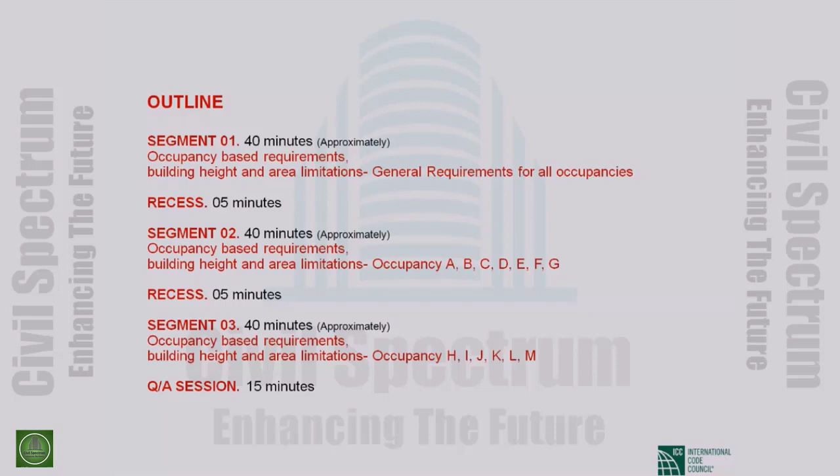So today's session will mainly focus on part 3, chapter 2 of BNBC. And so let us start with segment 1. Occupancy-based requirements, building height and area limitation. What are the general requirements for all the occupancies?

So to know the general requirements, we will go to section 2.4 of part 3, chapter 2. If you have the BNBC available with you, it will be on page 2673. So you can have a parallel reference from there if you wish. Part 3, chapter 2, section 2.4.

It covers basically these 6 subtopics. One is location on property, then the allowable floor areas, then permitted types of construction, general provisions for high-rise buildings, helipads, universal accessibility.

However, in the structure of BNBC, we must understand that no particular chapter or part is self-sufficient. We always use cross-referencing with different parts and chapters of this code.

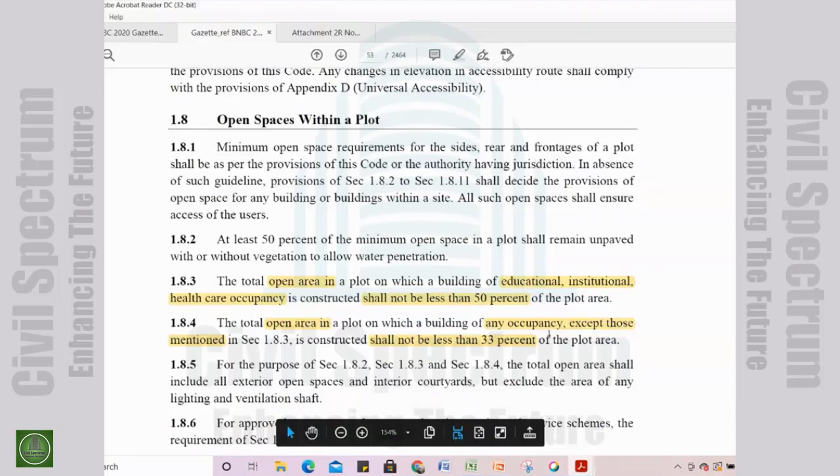So let us start with section 2.4. I'll switch the presentation to a different file. I think you can see it. So section 2.4 of part 3 chapter 2 - this is the page I'm showing directly from the BNBC 2020 gazette. You can see this is page number 2673.

We are starting from here, and at the very beginning we have a subtopic called location on property. This is a general requirement for all the occupancies. As I mentioned, specific requirements start from 2.5; 2.4 is for general requirements. So the first subtopic is location on property.

What does it say? It says that all plots where the building will be constructed shall have public access, access to a public road. It can be from multiple sides or from one side, but they must have access to a public road. So this is one criteria for location.

But there are other criteria for location, like fire separation distance. How will it be measured? It will be measured from the face of the peripheral wall of a building to the adjacent property line. So this is another guideline about the open space.

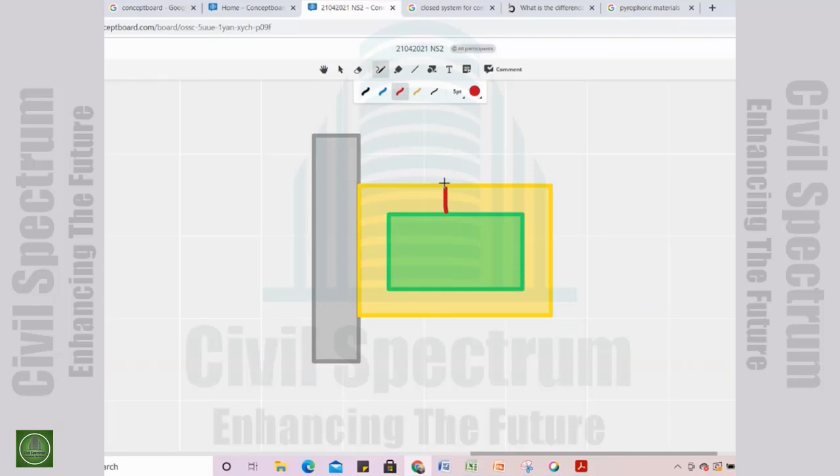Let me share a drawing platform. For example, here is a road somewhere, and there is a building plot here. So it says that if there is a building inside, the distance between the plot boundary and the outside edge of the building will be considered as the fire separation distance.

But for the purpose of this code, if the road is a public road, then the fire separation distance at the front will be this. So that is the basic idea - actually fire separation distance and setback distance may coincide or may not coincide. This is the idea of this particular segment.

So let's go back to the topic. The later part of this subsection says that for two or more buildings on the same plot, distances from imaginary lines equidistant from all sides of the buildings shall be considered. We have already discussed this in the last presentation, and shown how an imaginary line will be drawn within the site, and how setback or separation distance will be calculated from that.

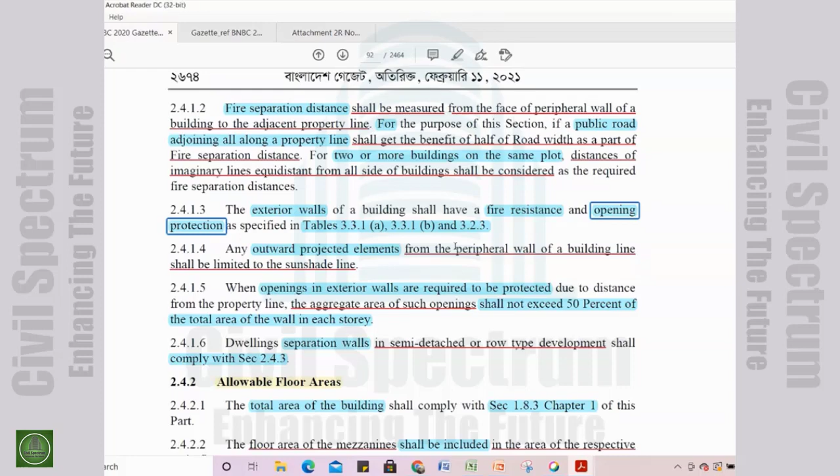Then comes information about openings. When there is an exterior wall, it must have a fire resistance rating, and opening protection will be required, because a wall resisting the spread of fire must be protected with properly rated openings.

That is the idea, and there are specifications in tables it refers to. Also, outward projected elements, like sunshades or anything projected, shall be limited to the sunshade line.

Another general requirement: when there are openings in the exterior wall, it has to be protected, but the aggregate of such openings shall not exceed 50% of the total wall area in each story. So we have a ratio for how large or how many openings, or how much opening area, we can create for each floor in a fire-protected exterior wall.

The other general information here says that separation walls in semi-detached or row type development shall comply with section 2.4.3. There is another reference to section 2.4.3, somewhere down this road, that it will comply with this particular section. So this is another thing we can at least get an idea of.

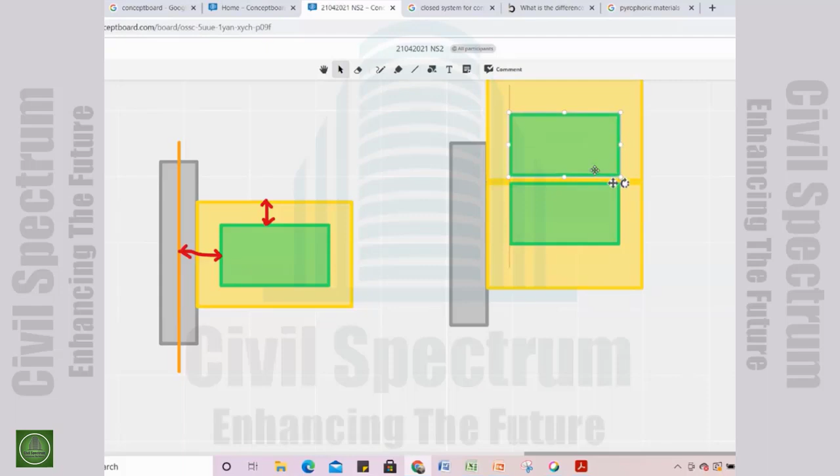So this is a semi-detached situation. Semi-detached in the sense that the buildings are joined, sharing one wall, and the other sides are open. So it is not a fully detached building like this one; it is a semi-detached situation.

So they can share a wall at the boundary line, at the property line. When that happens, the code says the separation wall will comply with section 2.4.3, the guidelines of section 2.4.3. So it must be taken care of.

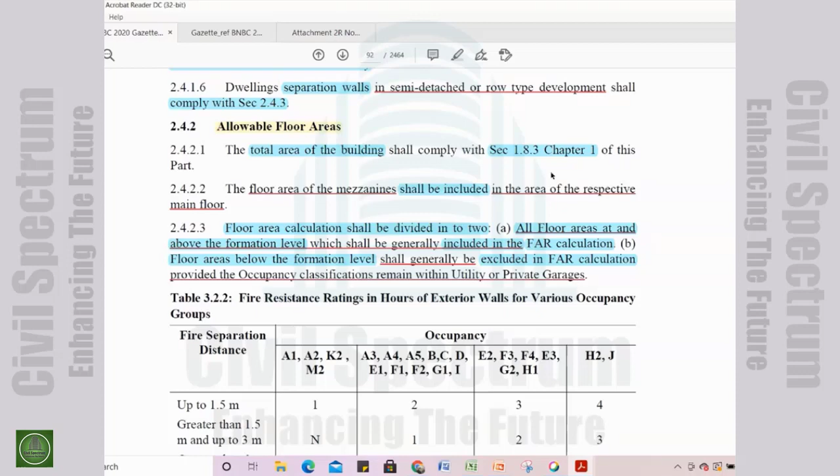In a row type, the walls will be shared on two sides actually, rather than one side. So allowable floor area, another general information for all occupancies, is that the total building area will be in compliance with section 1.8.3 of chapter 1.

So again we are referred to section 1.8.3, which basically deals with open space situations of a site and space requirements. We can go there and find out what the information is. It also covers many other pieces of information which may not be related to this particular section, or it may refer us to other sections or subsections as well.

So it is a kind of connected information network where we start from one point, go to the next reference point, and look for information. We can find it there, or look for more information at another reference point. The structure works like that.

The next subsection says that the floor of mezzanines shall be included in the area of the respective main floor. So how are mezzanine floors included in the area? If there are two levels, with a mezzanine level in between, there might be other floors. If there is a mezzanine floor here, it will be counted with this particular floor, the respective main floor. That is the basic idea.

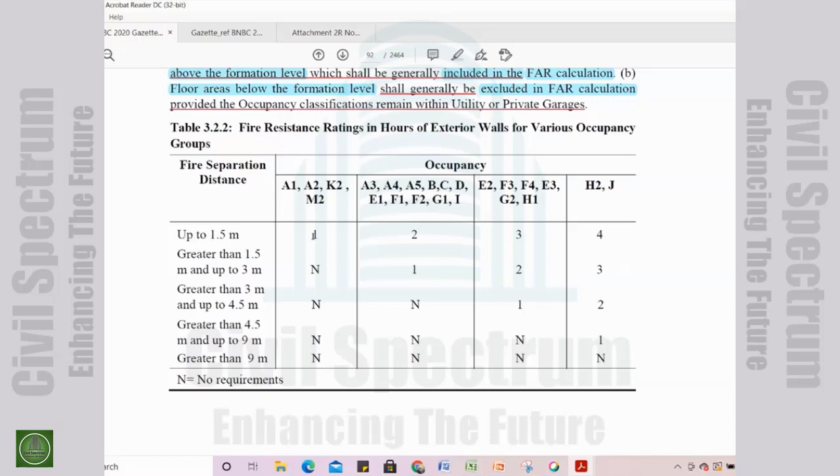Then comes a table which refers to the fire resistance rating for the exterior wall, as we saw referenced above many times. We can see that for different occupancies and different fire separation setbacks, the fire rating of the exterior wall varies considerably from occupancy to occupancy.

Section 2.4.3 deals with permitted type of construction. Construction for any occupancy shall conform to specifications set in table 3.2.4. As we can recall from the earlier presentation, it contains the construction classifications. So any type of construction for any occupancy must conform to the specifications of table 3.2.4.

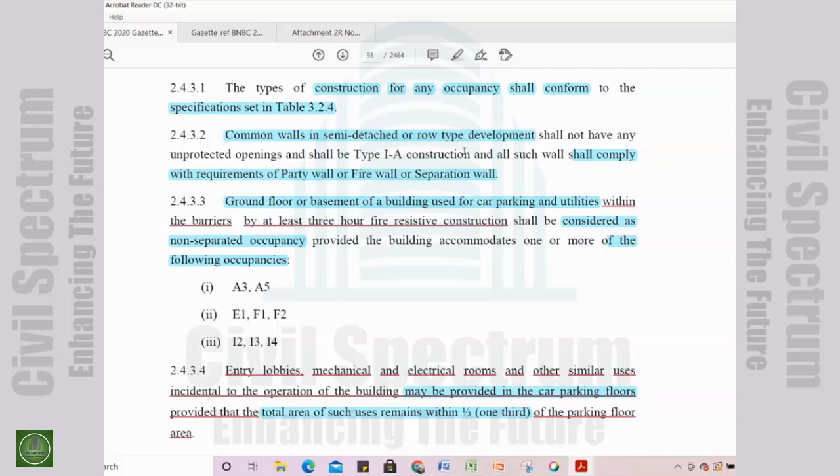The next segment, general information or general criteria for all occupancies, says that ground floor or basement of a building used for car parking and utilities within barriers of at least 3 hours fire resistive construction shall be considered as non-separated occupancy.

From yesterday's presentation, we already know about non-separated occupancy. So it can be created simultaneously in the same building where the main occupancy is located, if it is separated by 3-hour fire resistive construction. So the barrier will be 3 hours fire resistive construction.

Provided the building accommodates one or more of the following occupancies, so it is not open for all occupancies. It is open for A3 and A5, E1, F1 and F2, I2, I3 and I4. So these are the 8 occupancies that can have this particular facility.

Entry lobby, mechanical, electrical rooms and other similar uses incidental to the operation of the building may be provided in the car parking floor. So the services and utilities needed for the particular operation of the main occupancy can be connected with, can be located in the car parking floor, provided that the total area of such uses remains within 1/3 of the parking floor area.

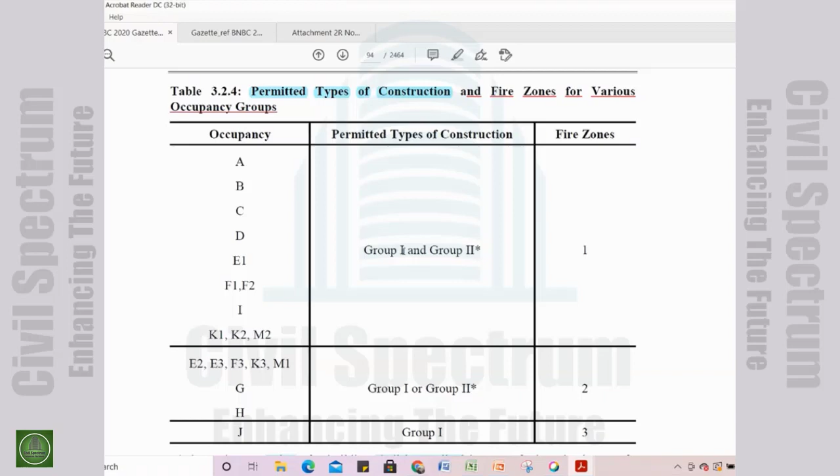So here comes the permitted type of construction. Already we have an orientation about different types of constructions, like group 1 and group 2.

The table says that particularly for occupancy J, group 1 construction is mandatory and it must be located in fire zone 3. The other groups have a secondary classification where they will be located in fire zone 2, and they can be of both group 1 and group 2 occupancies, but there are some footnotes on it. The same thing goes for group 1 and group 2 occupancies which can be located in fire zone 1, and these are the occupancies that can be located there.

So what is the footnote here? Let us have a look. Fire resistance rating of a building shall be credited, in case of mixed type of construction, on the basis of the lower rated construction elements. So it is the lower rated construction element that will dictate the fire rating of the building among the same group or same type used thereof.

So that is the general information, mostly about construction, area calculation.

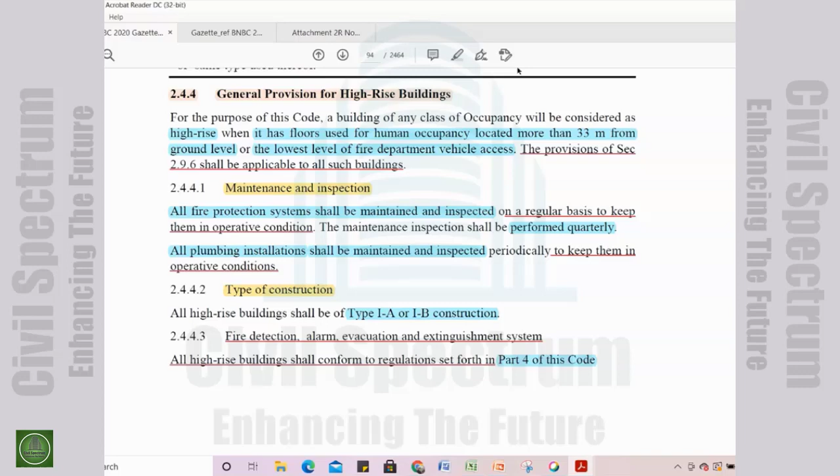which has floors used for human occupancy located more than 33 meters from ground level. So that is one definition for high-rise. Or there is another definition, the lowest level of fire department vehicle access. So actually it is contextualized in cities where we have a fire department with large fire ladders. The first definition will be applied, and for towns and secondary and tertiary cities where the fire department's vehicles cannot access a huge height, it will be determined by the fire department vehicle access level. So that is what the provisions are.

The provision of section 2.9.6 shall be applicable to all such buildings. Okay, so we'll have another clue about this in section 2.9.6.

So what will happen to this particular type of arrangement? When we make a high-rise, we need to maintain and inspect it at regular intervals. So all fire protection systems shall be maintained and inspected on a regular basis to keep them in operative condition. The maintenance inspection shall be performed quarterly. In all high-rise buildings, it must be there. So it is more of an operational guideline.

All plumbing installations shall be maintained and inspected periodically to keep them in operative conditions. So this is the safety precaution that in case of any fire emergency or anything, they all run properly. So this is a maintenance and inspection clause included in the code. It is more of an operational guideline. So type of construction, all high-rise buildings shall be of type 1A or type 1B construction.

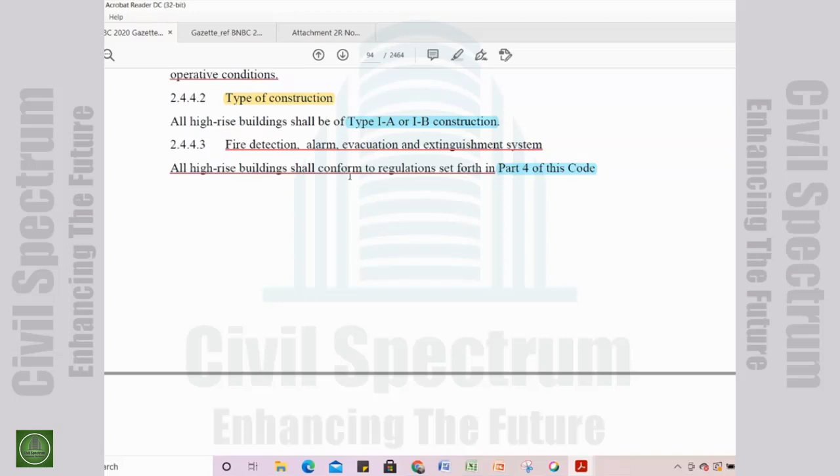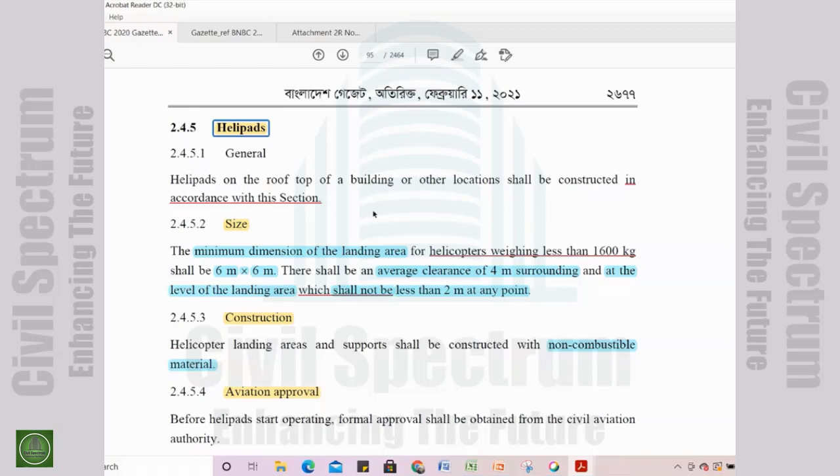Fire detection, alarm, evacuation, and extinguishment system. This section doesn't elaborate about this particular facility, but says it has to conform with the regulations of Part 4 of this code. So about fire or emergency evacuation or exit, we will always be referred to Part 4, which will be covered later on. There is also an option for helipads in high-rise buildings. Helipads on the rooftop of a building or other locations shall be constructed in accordance with this section, which has guidelines for size, construction, aviation approval, and so forth. I'm not going into the detail of this information.

Then comes the universal accessibility issue. Universal accessibility is, as you all know, necessary because a large section of our society is often physically challenged, either permanently or temporarily. So we must have universal accessibility provisions, but there are a few exemptions: in occupancies G, H, M, and J it is not mandatory. Other than that, all occupancies and buildings shall have universal accessibility. So apart from these 4 occupancies out of 13, the other 9 occupancies must have universal accessibility. Where universal accessibility is a mandatory issue, we must also follow the second guideline: we must have an accessible egress system. In case of emergency, there will be provision for people with incapability, disability, or different types of ability to egress through the system properly and safely. So this is very important, that at least 9 occupancies will have universal accessibility.

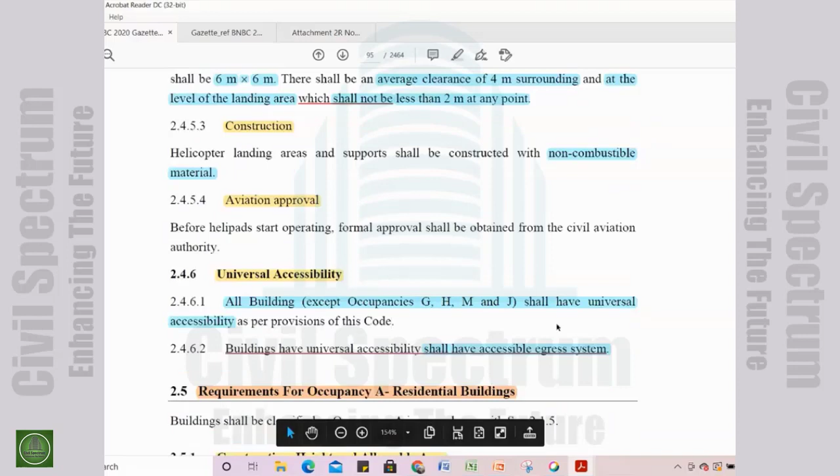We have a separate appendix for that. The provisions of the code are mentioned in an appendix in this part. So we have a separate accessibility appendix, and it covers almost all the guidelines needed for general purpose and for emergency purpose as well. So this is the end of segment 2.4, and then we go for the specific requirements for occupancy A to M, which will be the second component of our presentation today. So this is the end of segment 1.

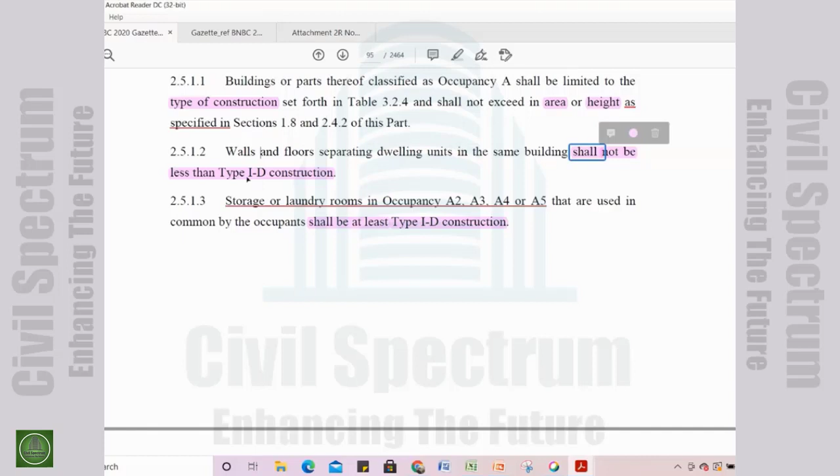At the same time, let us include another subsection, section 1.8, which specifically gives us information on height, so that will also be consulted time and again. About the walls and floors separating dwelling units - exterior walls and floors separating dwelling units, or interior walls where dwelling units are separated - shall not be less than type 1D construction. So it has to be minimum type 1D construction, that is 1 hour rated construction.

So that is the minimum requirement. Storage or laundry rooms in occupancy A2, A3, A4, and A5 that are used in common by other occupants shall be at least of type 1D construction. So if there is any common storage area for the apartment, hotel, or other occupancies, or a laundry room that is used by occupants in common, that will be of type 1D construction. So these are construction guidelines, and the area and height guidelines will be specified by these two sections.

When a basement or ground floor of a building of occupancy A3 or A5 is used for parking, this is about these two particular occupancies, A3 and A5. When its basement or ground floor is used for parking or storage of private cars of the occupants, the parking floor shall be of at least type 1B construction. So there is another criteria. We already know that type 1B is 3 hour protected construction.

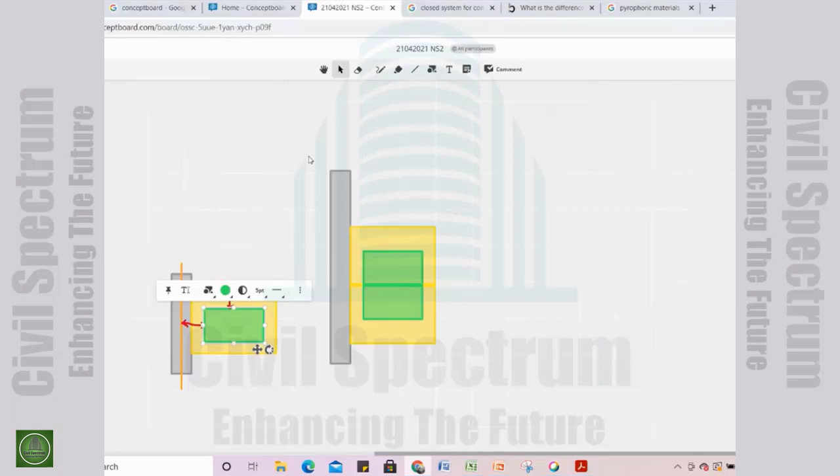I think I can at least clarify certain issues on this part. Say for example, if a site is permitted for only detached occupancies, then things will be like that. So the location of building will vary, but if the same site is permitted for semi-detached occupancies, the location will be another situation. And if it is for row house type, then it might happen that the location will vary accordingly. So that is the basic understanding. However, it is determined by setback rules and fire separation rules. So from that part, we can have this general idea of location of building in the property.

So about access and exit facilities and egress system. This is a general statement as well, that all access, exit and egress or escape shall comply with the provisions set forth in this code. Basically it will refer to part 4, and there is a separate chapter for dealing with these issues. So we'll see for other occupancies as well that it will refer again and again to that particular chapter of part 4.

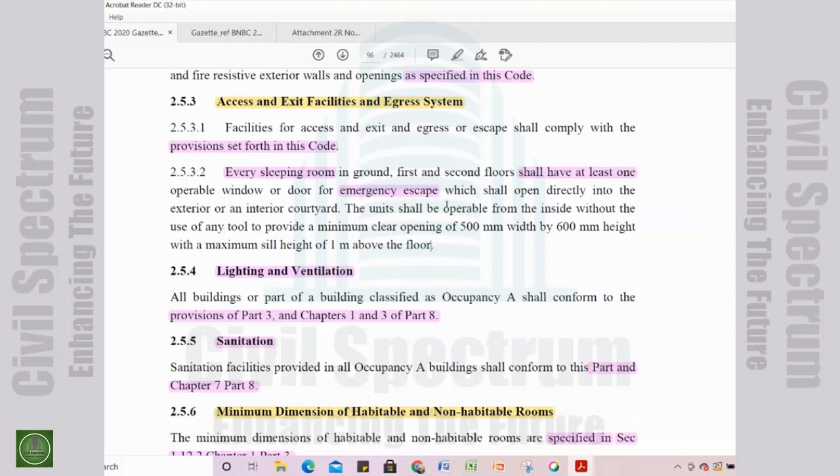Lighting and ventilation is basically covered in some provisions of part 3, and chapter 1 and 3 of part 8, which deals with mechanical ventilation and everything. So the lighting and ventilation criteria will be covered by these two areas, and we have to conform to those guidelines. The sanitation will also be referred to this part, and also chapter 7 of part 8. So part 8 covers both lighting, ventilation and sanitation. In the later occupancies, we will see that this segregation doesn't exist; in many occupancies, lighting, ventilation and sanitation are in one subsection.

Minimum dimension of habitable and non-habitable rooms.

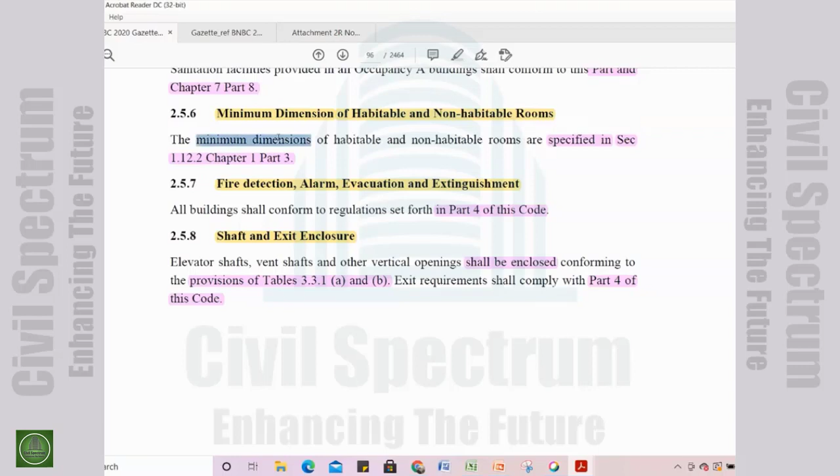This is also not elaborated in this particular subsection. It says that the minimum dimension of habitable and non-habitable rooms are specified in section 1.12.2 in chapter 1, part 3. So there are specifications for habitable and non-habitable rooms, specifying the minimum dimension for each of the rooms, and it will be guided by that section.

Fire detection and alarm: fire detection, alarm, evacuation, and extinguishment. This is an issue of part 4, and it is elaborated there, so it is referred to that part.

Shaft and exit enclosure. Any vertical elevator shaft, vent shaft, or vertical opening shaft shall be enclosed. It cannot be open; it has to be enclosed, conforming to provisions of table 3.3.1a and b. So there is a table for particular shafts and vents, and we have to comply with that. Exit requirements shall comply with part 4 of this code, regarding these shafts and exit enclosures. We must consult that.

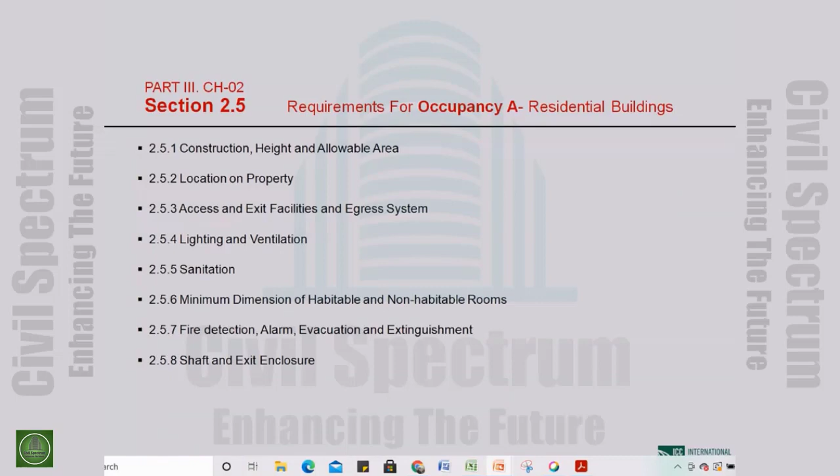So this is what occupancy A specific requirements are. Before starting occupancy B, we will take a look at a general referencing system of this code.

So actually, for all occupancies, from section 2.5 to 2.17, we will have the same thing repeated - the right column here, the requirements for each occupancy. It will be repeated again and again for each occupancy, dealing with construction, height, allowable area, location on property, access, exit facilities, egress system, lighting, ventilation, sanitation, minimum dimension of habitable and non-habitable rooms, fire detection, alarm, evacuation, extinguishment, shaft and exit enclosures.

With a few exceptions, they all carry similar referencing sections and chapters. For construction, height, and allowable area, we will visit section 1.8, 1.9, chapter 1, part 3, and section 2.4.2, table 3.2.4, chapter 2, part 3. This is a common referencing point for these components, covering open spaces within a plot and general height and area limitations.

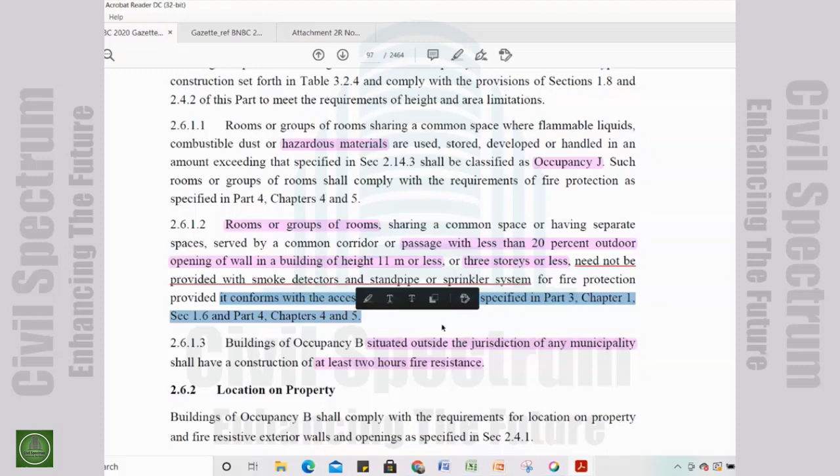However, it has to confirm that the access and exit requirements specified in Part 3, Chapter 1, Section 1.6, and Part 4, Chapter 4 and 5, are conformed to. So if it conforms to that, this provision can be applied.

Buildings of occupancy B situated outside the jurisdiction of any municipality shall have a construction of at least 2 hours fire resistance. This is covering maybe schools in remote areas which are not under the jurisdiction of a municipality. However, it's not only about schools but any occupancy of B category. So they must be constructed with at least 2 hour fire resistance.

We are not going into detail for location of property, access and exit facilities and egress system, lighting, ventilation and sanitation. We are going directly to the minimum dimension of classrooms, common toilets and staircases. So it is a specific requirement for particularly this segment, occupancy B.

The dimension of classrooms shall not be less than 4 meters on any side and shall have an area not less than 0.75 square meter per student. So that is the space requirement here.

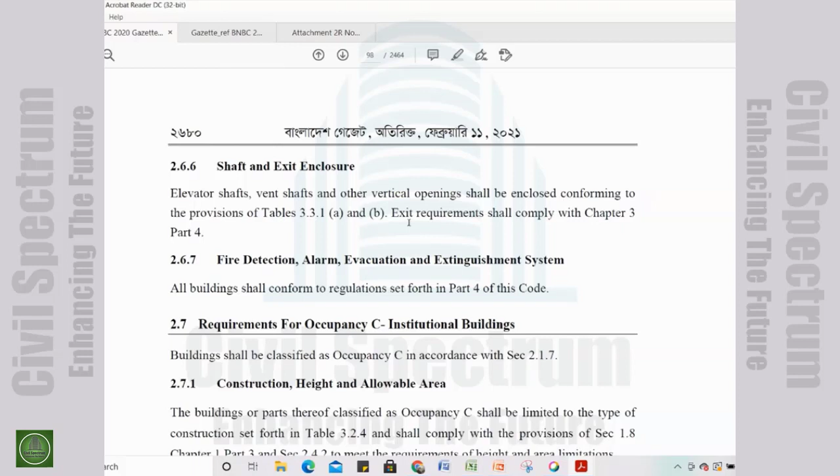Other provisions will comply, like general references as done in other occupancies. So the shaft and exit enclosure, fire detection, alarm, evacuation and extinguishing system, these are referred to some other sections or chapters for the rest of the occupancies.

So that is the end of occupancy B. Let us start with occupancy C. It is institutional building. As you can see, we haven't marked here, but it is mostly typical referencing to other chapters. So construction height and allowable area doesn't specify anything special.

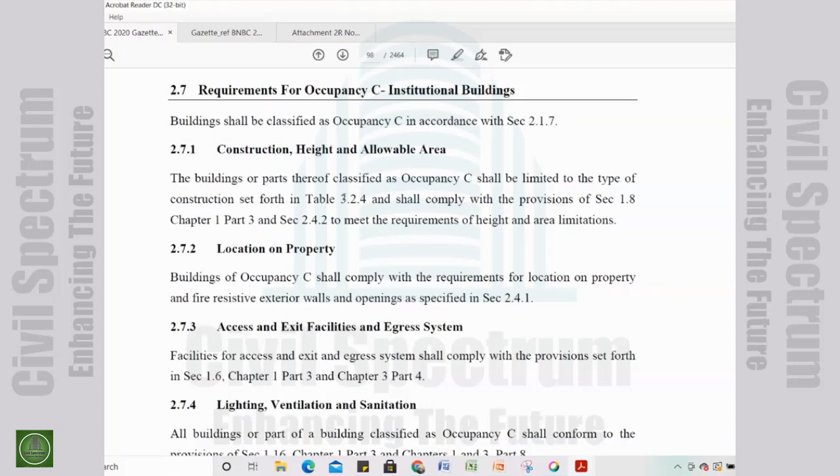Location on property is the same as other occupancies; access and exit facilities and egress system, as it is not same in a sense that the criteria is same, but they are all referred to the same subsection or chapters or part of this code. So these are all referred to other sections and parts of the code.

So for institutional buildings, there is no special criteria needed here. So for occupancy D, that is healthcare facilities...

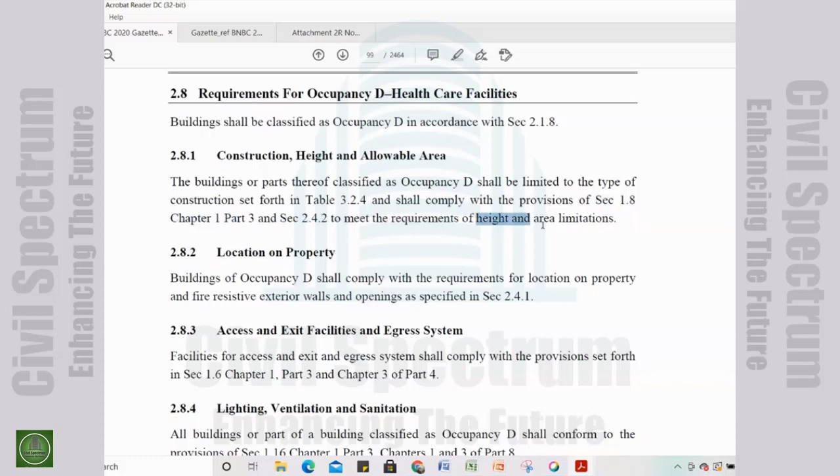It is again the similar requirements that it is referring for construction, height and allowable area. It is referring to Table 3.2.4, Section 1.8, Section 2.4.2. These are common referencing points for height and area limitations. So this is for location on property, again referring to Section 2.4.1.

Egress, access and exit facilities referring to Part 3, Chapter 1, Section 1.6, Part 4, Chapter 3. Lighting, ventilation, sanitation referring to 1.16, Part 3, Chapter 1, and Chapter 1 and 3 of Part 8.

So here you can see that sanitation is not a separate subsection already; it comes along with lighting, ventilation and sanitation. So shaft and enclosure is referred to Chapter 3 of Part 4. Fire detection, alarm, evacuation, extinguisher system is also referred to Part 4.

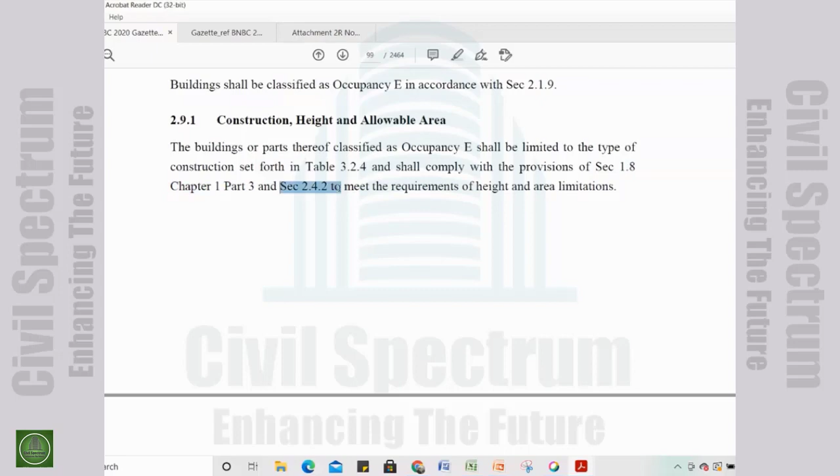For business occupancy, the reference points are similar: Table 3.2.4, Section 1.8 of Chapter 1, Part 3, Section 2.4.2 of this particular chapter. Location of property Section 2.4.1, access exit facilities similar referencing, lighting, ventilation similar references, shaft and enclosures similar references, fire detection, evacuation and extinguishing system refer to Part 4.

So let us go to the mercantile occupancy. The mercantile occupancy is almost similar in subsections. They are referring to the same tables and sections of different chapters and parts.

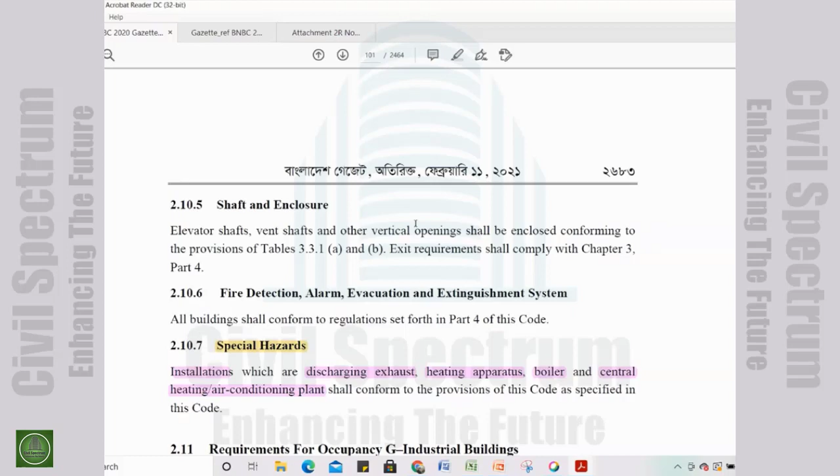However, there is a special hazard clause in this mercantile occupancy F, a bit different from others. It says that installations discharging exhaust, heating apparatus, boiler, and central heating or air conditioning plant shall conform to the provision of this code as specified in the code. So for the mercantile section particularly, there is a special hazard clause, and the designer must take account of that.

Now comes the requirement for occupancy G. We will end this particular segment with details of occupancy G. We have made some changes from the PowerPoint we provided to you; it was in segment 3, but considering the time available, we think occupancy G will be involved in this second segment. So this is the last occupancy we will be discussing in this segment.

About occupancy G, it is the industrial building category, as you know. The general information is here, but there are specific instructions referring that a non-exhaustive and indicative list of low hazard and moderate hazard industrial uses are listed in an A to Z list at the end of this chapter, chapter 2. We can consult the table to find which category our particular industrial building falls into.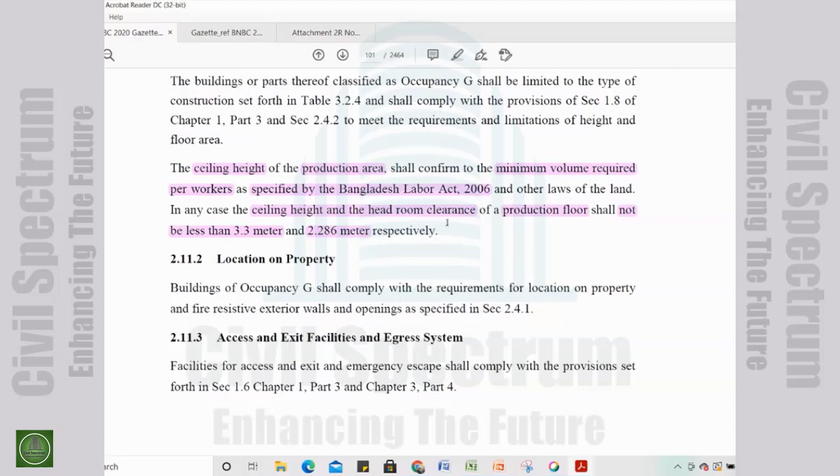So these are two basic guidelines about the height of the production area or production floor for any industrial occupancy G. There are also special provisions for lighting, ventilation, and sanitation. First it has to conform, like other occupancies, with the general guidelines set forth in Part 3 and Part 8 in different chapters.

But industrial buildings, when they have a roof opening for daylight or natural ventilation, shall comply with the following requirements. The first requirement is that the aggregate opening, including both roof and external windows, shall not be less than 10% of the floor area.

The second clause says that for natural ventilation by means of exterior window openings, the operable window area shall not be less than 5% of the total floor area. This operable window area is also very important because natural ventilation will be ensured by that.

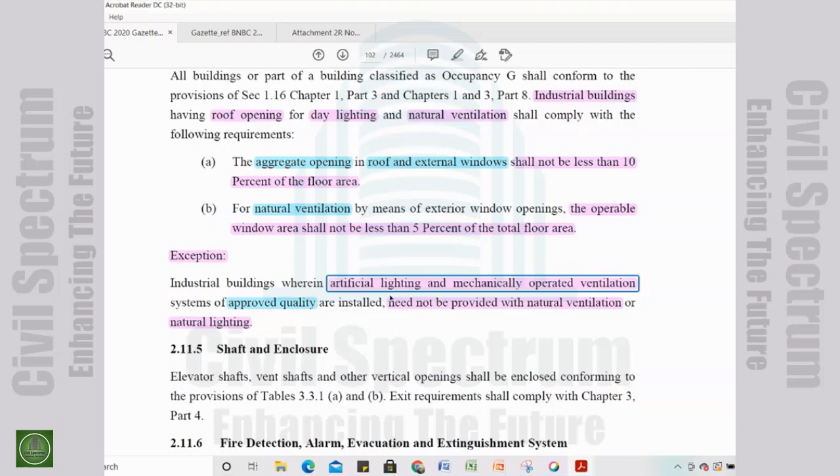There are exceptions to these clauses. Maybe there are some industries that don't require natural ventilation and rely more on an artificial environment, so for that special situation this exception is made. It says that an industrial building wherein artificial lighting and mechanically operated ventilation systems of approved quality are installed need not be provided with natural ventilation or natural lighting, since the production process may need a particular specific controlled environment of light and ventilation.

For shaft and enclosure, it is common to other occupancies and refers to the same points. Fire detection, alarm evacuation, and extinguishment always refer to Part 4 of this code. And now we come into the special hazard situation.

So, special hazard: it's about the chimneys, vents, and ventilation ducts, which shall be constructed with noncombustible materials. As we can all guess, industrial environments may need chimneys, vents, and ventilation ducts, so they all must be made with noncombustible material.

Even boiler, central heating plants, electrical rooms, or hot water supply boiler shall be separated from the rest of the occupancy and used by not less than 2-hour fire resistive construction. So there are two things about these particular components: they shall be separated from the main occupancy, and also from the rest of the occupancies if there are other occupancies.

So, starting from occupancy B, we have gone through the following specific requirements for occupancy C, D, E, F, and G. Probably we are quite ahead of time, but I think this is the end of segment 2.

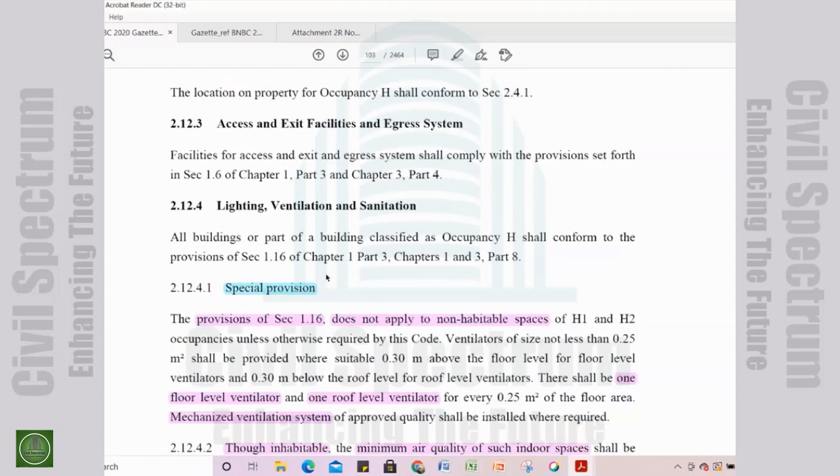So let's move to the detail of occupancy H. Occupancy H is for storage buildings. It has a general statement, like all occupancies, for construction height and allowed areas, referring to the same points of reference. For location on property, similar references; access and exit facilities and egress systems, similar references; lighting, ventilation, and sanitation, similar references. Now, at the beginning there are similar references, but it has subsections which need elaboration, so there are special provisions.

The provision of section 1.16 does not apply to non-habitable spaces. There are two types of spaces as per definition: one is habitable, one is non-habitable. For this particular storage occupancy, there are spaces with lots of non-habitable areas. So it is separately mentioned that while there will be non-habitable spaces in H1 and H2 occupancies, there will be some relaxation from section 1.16 for those non-habitable spaces.

So unless otherwise mentioned or required by the code, if it is required it has to comply with 1.16, but if not, for non-habitable spaces, provisions of section 1.16 will not apply. So what will happen for non-habitable spaces?

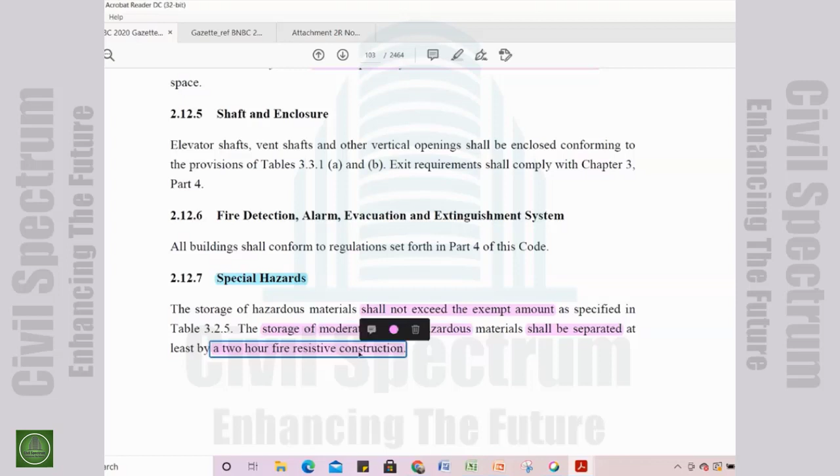The storage of moderate and low hazardous materials shall be separated by at least 2-hour fire resistive construction. That is a special clause for special hazards.

We come to the next occupancy, dealing with assembly buildings. As usual, the construction height and allowable areas refer to the similar references like other occupancies. Location on property, similar references. Access and exit facilities and egress system also refer to similar references.

Although there is one special point here: universal accessibility as per provision of this code has to be ensured. Maybe there are other areas where this clause is there. It is intermittently on and off for particular occupancies. Lighting, ventilation, and sanitation with similar references.

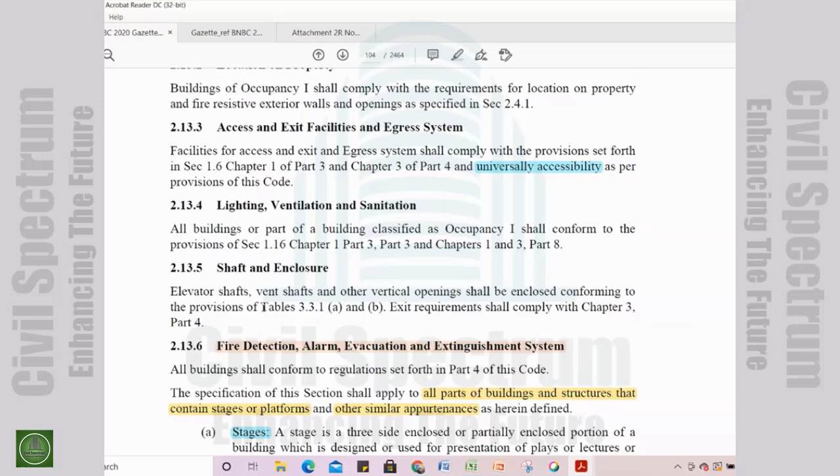Shaft and enclosure, similar references. And now comes the fire detection, alarm, evacuation, and extinguishment system. Actually this segment is mostly discussed in part 4, but here there are some elaborations for the specific situation of this particular occupancy. So what is that?

The first line states that it has to conform to the regulations set forth in part 4. This is a common statement like other occupancies. But what about the rest? The specification of this section shall apply to all parts of the buildings and structures that contain stages or platforms and other similar appurtenances as herein defined. So there is a first definition. Maybe in these subsections there is a hierarchy issue - I'll mention that later. But there is a definition for stages.

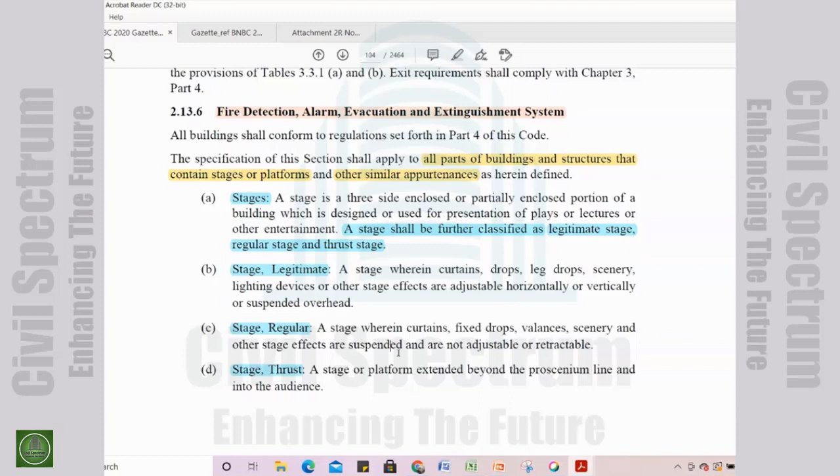The third stage is a thrust stage - a stage or platform extended beyond the proscenium line into the audience. A thrust stage is basically a stage that, as in a typical auditorium situation, let me draw a schematic. This is the audience area, this is the performance area - the stage is mainly for performance. So a thrust stage is something which comes out beyond the proscenium line.

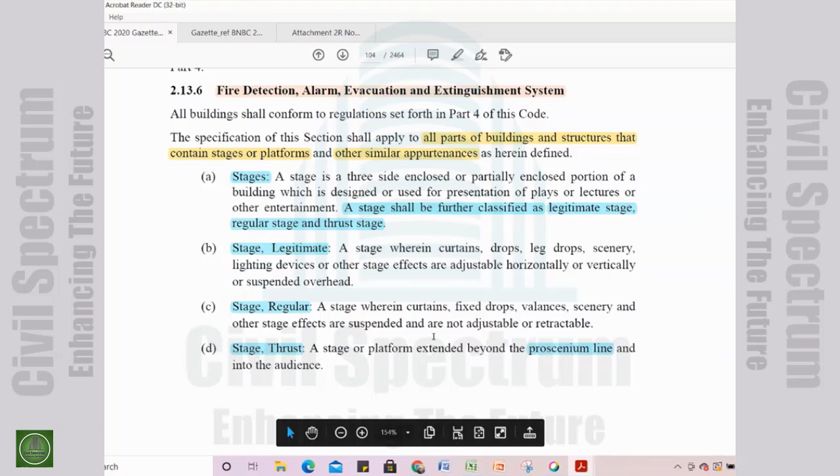So the proscenium line is here somewhere, the overhead defining area of the stage. When the stage crosses this line, it is called a thrust stage - a stage or platform extended beyond the proscenium line into the audience, coming very close to the audience. So for these three types of situations, we need to take special measures.

For legitimate stage, it shall be constructed as specified by part 4 and shall not be less than construction type 1C. So at least 2 hours fire resistance with non-combustible materials.

So the portion of the legitimate stage extending beyond the proscenium opening line shall be permitted to be constructed with 2-hour fire resistive material. If it crosses the line of proscenium, then it becomes a type 1C type of construction.

The floor of the stage may be constructed with 1-hour fire rating materials. As you know, usually it is made of wood. Wooden floors are preferred in most cases, so it has to be 1 hour fire rating. Thickness of the wood floor shall not be less than 50 millimeter. To ensure that fire rating, we need to work on the thickness of the wooden floor, or other treatments if necessary.

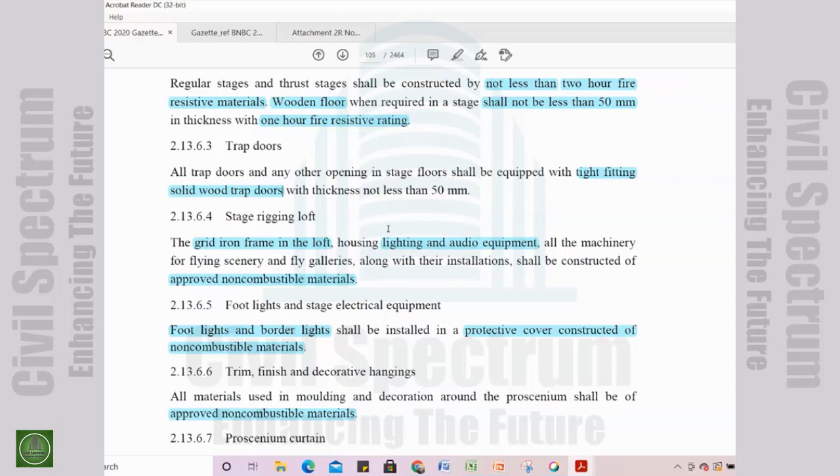There are special provisions for trapdoors. All trapdoors or any other opening in a stage shall be equipped with tight fitting solid wood trap doors. So any trapdoor that might be part of the stage has to be a tight fitting solid wood trapdoor with a specific thickness not less than 50 millimeter.

Stage rigging loft: the gridiron frame in the loft housing lighting and audio equipment happens on the top side of the proscenium. Housing the lighting and audio equipment, all the machinery for flying scenery or fly galleries along with their installations shall be constructed of approved non-combustible material. So there is a material specification for the stage rigging loft.

Footlights and stage electrical equipments. There will be many footlights and stage electrical equipments. For them, they shall be installed in a protective cover constructed of non-combustible material. So there must be special measures to protect them with a protective cover made of non-combustible materials.

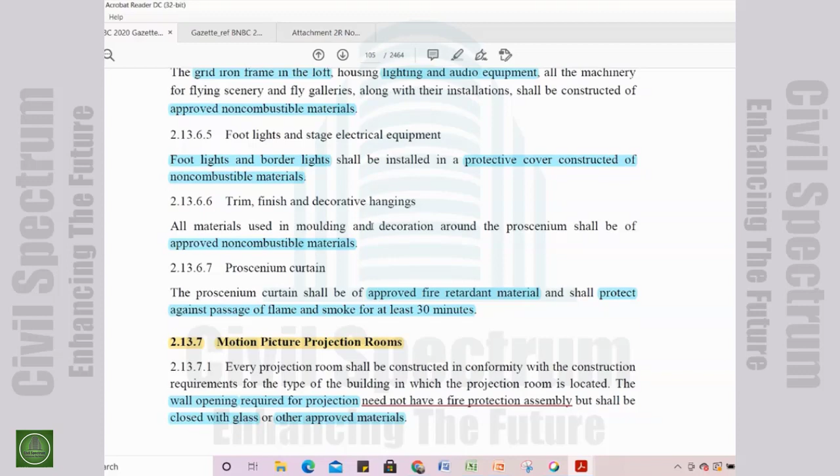Trim, finish and decorative hangings. All materials used in molding and decoration around the proscenium shall be approved non-combustible material. This is very important, that the material surrounding the stages must be non-combustible, except the wooden floor, but it has a particular specific criteria. If used, it may not be wooden floor as well.

The proscenium curtain shall be of approved fire retardant material. It has to have a fire rating also, and shall protect against passage of flame and smoke for at least 30 minutes. Since it is a large curtain, in case of any fire event it may pose hazard to both the audience and the performers, because its location is in between. So it must be made of fire retardant material that protects people, and flame or smoke cannot spread quickly on it. It has to be of such material, and it will protect for at least 30 minutes. So this is one criteria about the proscenium curtain.

When there is a projection facility, such as motion picture projection rooms, every projection room shall be constructed in conformity with the construction requirements for the type of building in which it is located. The wall opening requirement for projections need not have a fire protected assembly. Since there is an aperture in the projection room for the projection facility, that particular opening need not have a fire protected assembly, so it can be a non-protected opening, but shall be closed with glass or other approved materials. It will not be an open connection, it has to be closed with glass or other approved material.

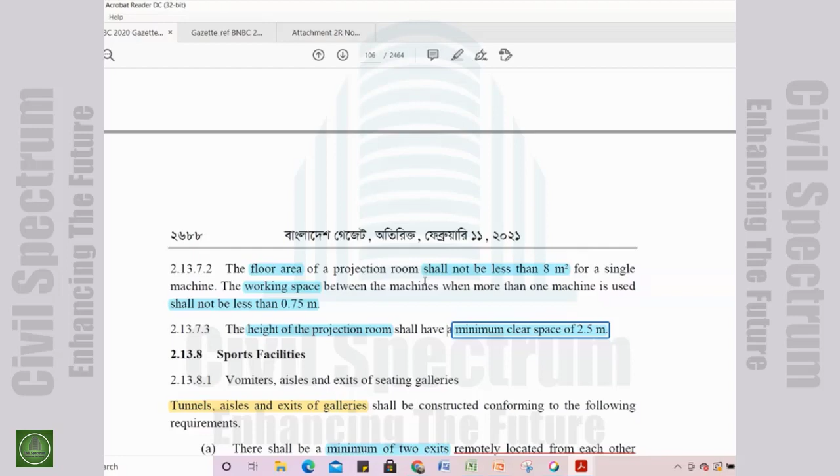So this is one type of assembly where stages and projections are there. Now we'll go for the other type of assembly occupancies, like sports facilities, where a large amount of people gather together for a sports event or anything. The vomitories, aisles and exits of seating galleries have a few special clauses: tunnels, aisles and exits of galleries shall be constructed conforming to the following requirements.

There shall be a minimum of 2 exits remotely located from each other, leading immediately to the outside. So at least 2 exits must be there; there is no provision for a single exit. There must be at least 2 exits remotely located from each other, leading immediately to the outside, for each balcony or tier. So it is mandatory that if there are balcony or different tier situations, we ensure at least 2 exits from each tier or balcony, leading immediately to the outside.

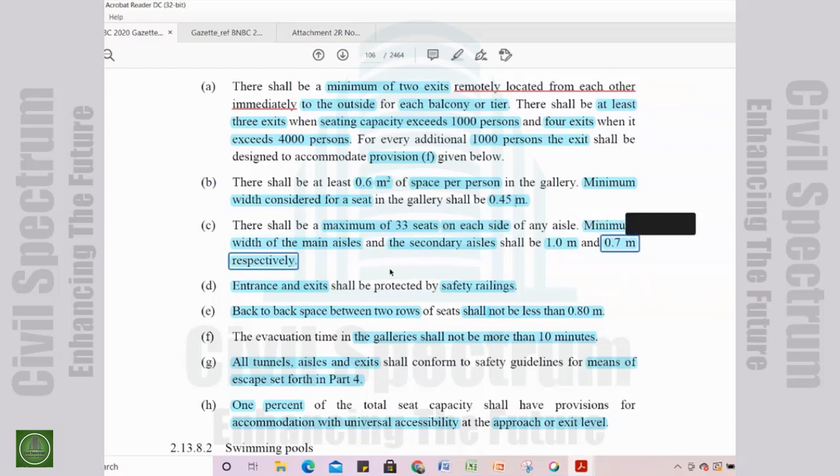There shall be at least 0.6 square meters of space per person in the gallery. Minimum width considered for a seat in a gallery will be 0.45 meters. There shall be a maximum of 33 seats on each side of an aisle. Minimum width of the main aisles and secondary aisles shall be 1 meter and 0.7 meter respectively - this is the minimum width. Of course, there might be other standards which may suggest a different dimension. Good practice will be to facilitate for the best.

Entrance and exit facilities shall be protected with safety railings. This is a situation where a crowd occurs and stampede may occur, so there must be safety railings to protect the users. Back-to-back space between two rows of seats shall not be less than 0.8 meter. The evacuation time, as we already know, in galleries shall not be more than 10 minutes. All tunnels, aisles and exits shall conform to the safety guidelines for means of escape set forth in Part 4. So this will actually be part of means of escape.

And there was a question here: what is an egress? An egress is a means of escape, specifically meant for emergency situations. 1% of the total seat capacity shall have provision for accommodation with universal accessibility - 1 in every 100 people should have universally accessible seating arrangement, but it has a specific criteria that it has to be located at the approach or exit level, from where fire evacuation will be easiest, so emergency evacuation will be easiest.

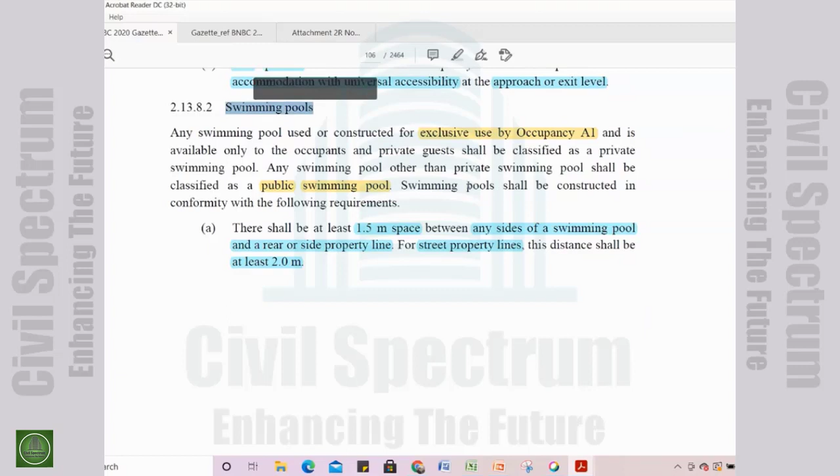The other sports facilities like swimming pools - swimming pools can be of 2 categories: one is a private swimming pool, and the other is a public swimming pool. Swimming pools used or constructed for exclusive use by occupancy A1, a special category available only to the occupants and private guests, shall be classified as private swimming pool. So private swimming pools are associated with occupancy A1. Any swimming pool other than a private swimming pool shall be classified as a public swimming pool. So all other categories of swimming pool are public swimming pool.

Swimming pools shall be constructed in conformity with the following requirements. There shall be at least 1.5 meters of space between any side of the swimming pool and a rear or side property line - so it has a setback criteria, it cannot go to the property line, it needs a setback of 1.5 meters from the rear or side property line. For the street property line, it needs a setback or distance of at least 2 meters - so it is a bit more in the front.

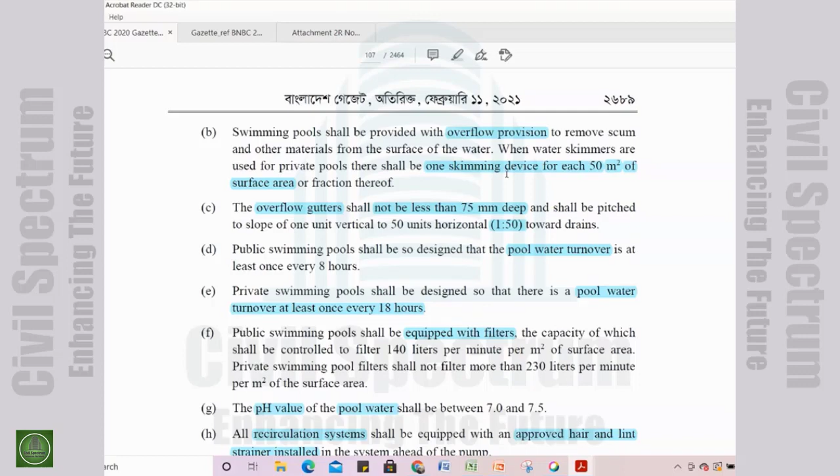Swimming pools shall be provided with overflow provisions to remove scum and other materials from the surface of the water. When water skimmers are used for private pools, there shall be one skimming device for each 50 square meter of surface area. So particularly for maintenance purposes, when skimming devices are installed, there will be 50 square meters per skimming device. So if the pool is larger, we will need more skimming devices there.

The overflow gutters shall not be less than 75 millimeters deep, and shall be pitched to a slope of 1 unit vertical to 50 units horizontal. So 1:50 will be the pitch of the gutter slope, and it has a specific location. It shall not be less than 75 millimeters deep.

The public swimming pools shall be so designed that the pool water turnover is at least once every 8 hours. So it is also a hygiene requirement, as you can understand, that in every 8 hours the pool water must be turned over in public swimming pools.

Private swimming pools shall be designed so that there is a pool water turnover at least once every 18 hours. So it is a bit relaxed for private swimming pools.

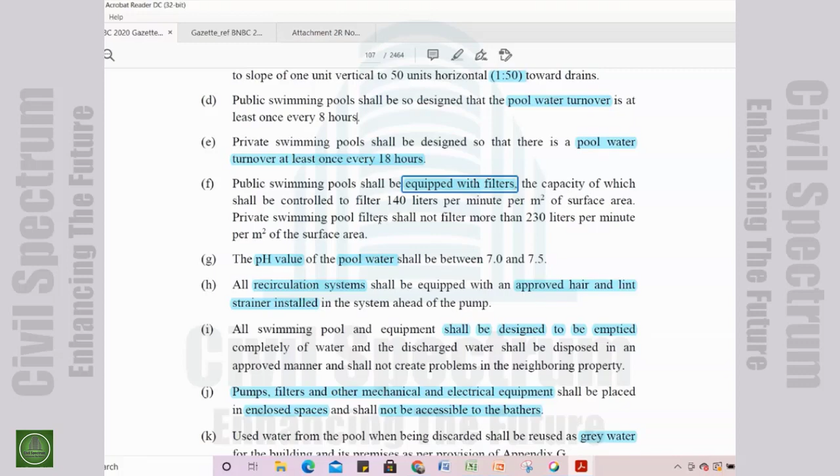Public swimming pools shall be equipped with filters, the capacity of which shall be controlled to filter 140 liters per minute per meter square of surface area. Private swimming pool filters shall not filter more than 230 liters per minute per meter square of surface area. So these are all maintenance issues mostly, maintaining the pool and the water quality, of course.

The pH value of the pool water shall be between 7 and 7.5. The recirculation system shall be equipped with an approved hair and lint strainer installed in the system ahead of the pump. So it is for the safety of the pump. There are filters which protect the pump. So that is also a maintenance issue.

All swimming pools and equipment shall be designed to be emptied completely of water, and the discharged water shall be disposed of in an approved manner and shall not create problems to the neighboring property. So it will be the discharge of the pool, and also about the civic responsibility of the owners and the designers, so that we cannot cause any problem to the neighbors.

There will be pumps, filters, and other mechanical and electrical equipment that will be placed in enclosed spaces not accessible to the bathers. So the swimmers or bathers who are coming here cannot access its mechanical and electrical facilities. They must be retained in an enclosed situation and inaccessible to the regular users.

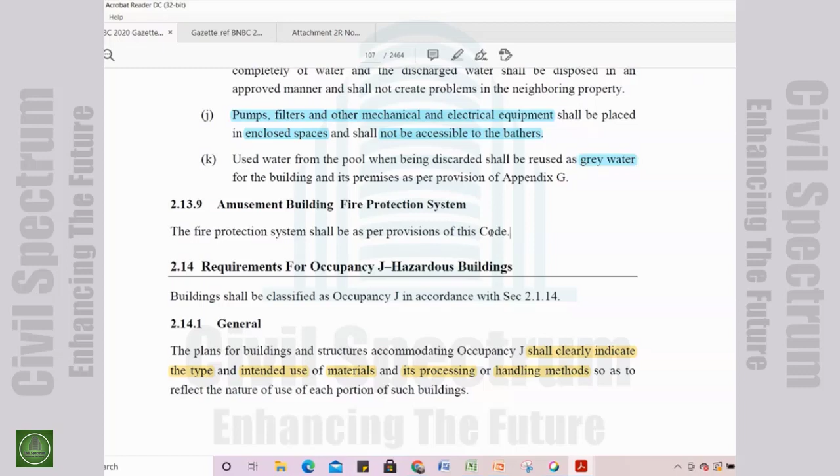For fire protection, the fire protection system shall be as per provision of this code, so it is referred to Part 4. Now comes the hazardous occupancy, occupancy J.

The plans for buildings and structures accommodating occupancy J shall clearly indicate the type. I think we should highlight these points. Number 1 is the type. Number 2 is the intended use of materials. Number 3 is its processing, and number 4 is the handling method. So for any hazardous building, these are very important.

The type and the intended use of materials is very important, and how it is processed there, and how we are handling it. So these are the 4 points we must focus on in a hazardous building, so as to reflect the nature of use of each portion of such buildings.

As we know, there are 4 kinds of hazardous buildings, starting from explosion hazard, then we have chemical hazard, we have biological hazard, we have radiation hazard buildings. So occupancy J1 is about explosion hazard.

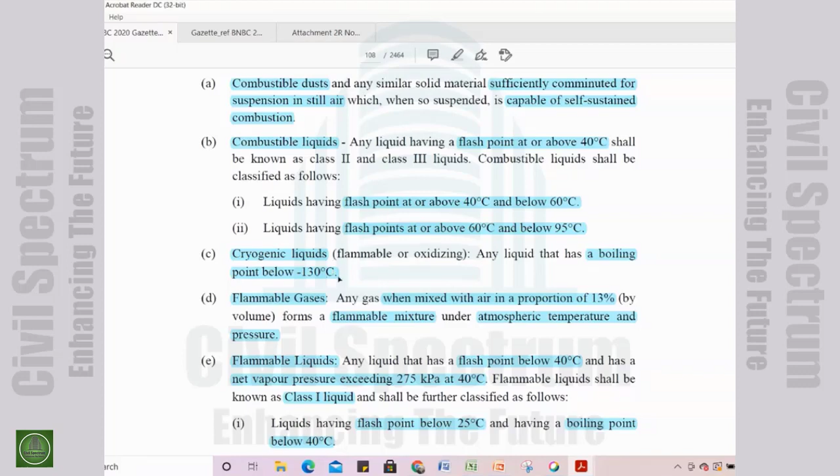Cryogenic liquids, flammable or oxidizing: any liquid that has a boiling point below minus 130 degrees centigrade. So it has a boiling point - we are not quite familiar with liquids that have a boiling point at minus level. Cryogenic liquids might be needed for particular operations in industrial or lab facilities. So if it is there above the exempted quantity, it will be classified as occupancy J1.

Flammable gases: any gas when mixed with air in a proportion of 13% by volume forms a flammable mixture under atmospheric temperature and pressure. So if any such gases are present there, more than the exempted quantity, it will be categorized as J1.

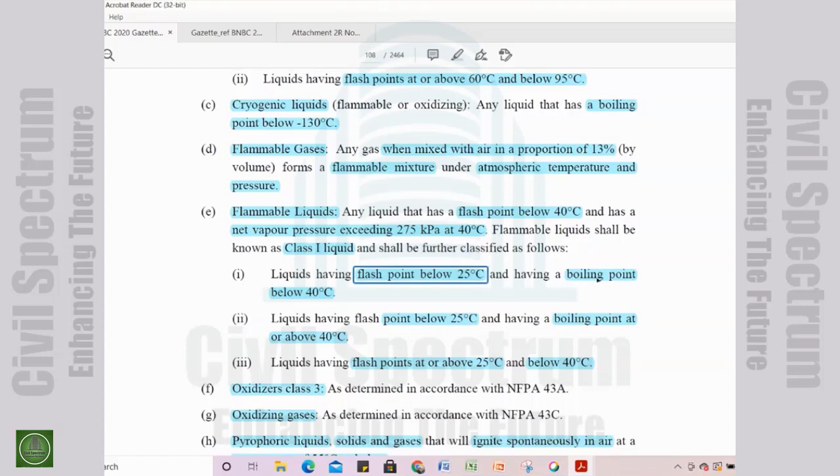Flammable liquids: any liquid that has a flash point below 40 degrees centigrade and has a net vapor pressure exceeding 275 kPa at 40 degrees Celsius. Flammable liquids shall be known as class 1 liquid and shall be further classified as follows: liquids having flash points below 25 degrees Celsius and having a boiling point below 40 degrees Celsius; liquids having a flash point below 25 degrees Celsius and having a boiling point at 40 degrees centigrade or above; and liquids having flash points at or above 25 degrees centigrade and below 40 degrees centigrade.

Oxidizers class 3, a particular type of oxidizer, it has been referred to another code, NFPA of USA, a particular section of that. So for oxidizer class 3, it is referred to that code. Oxidizing gases as determined in accordance with NFPA 43C is again referred to another code. So this referencing continues - it can be referred to this code, this particular part, or other parts, or even other international codes as well.

Pyrophoric liquids, solids and gases that will ignite spontaneously in air at a temperature of 55 degrees centigrade or below. So this is another criteria.

Am I audible? I think I'm having some network trouble here. Can you listen to me? Okay, but the screen share is not working properly. Let me share it again.

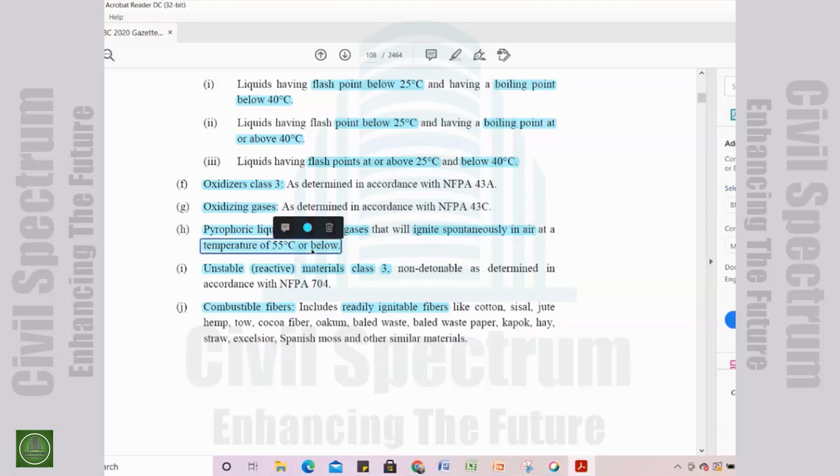So we were here at section F and G. Then comes section H: pyrophoric liquids, solids and gases that will ignite spontaneously in air at a temperature of 55 degrees centigrade or below. So within the exempted quantity, it will be part of the main occupancy, but above the exempted quantity, it will be classified as J1.

Unstable or reactive materials of class 3, non-detonable, as determined in accordance with NFPA 704. So that is another hazardous material.

Combustible fibers - this is very relevant to us in many industries or production areas, as we use materials that fall into this category. This includes readily ignitable fibers like cotton, sisal, jute, hemp, tow, cocoa fiber, oakum, baled waste paper, kapok, hay, straw, excelsior, Spanish moss, and other similar materials. So these are all combustible materials, and there is an exempted quantity for them in Part 4. Above that, they will be categorized as J1.

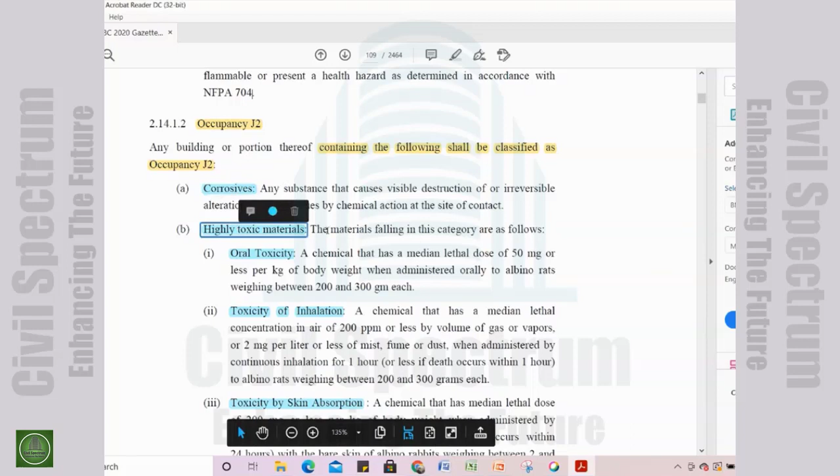So we can see lots of references to NFPA for occupancy J1. For occupancy J2, as we can see from our previous classification, it is about chemical hazard occupancy. So there are different types of hazards. One is corrosive, one is highly toxic material, and the toxicity may be oral toxicity or toxicity of inhalation or toxicity by skin absorption.

So there are different types of toxicity and there are provisions for that. It can be irritants as well. So any chemical deposition can create allergic reaction or inflammation in any part or tissue of the body. So they can be irritant as well. They can be radioactive material, so that is also a kind of hazard. They can be sensitizers.

For toxicity, we have these subcategories, and we have the determined reference for them here.

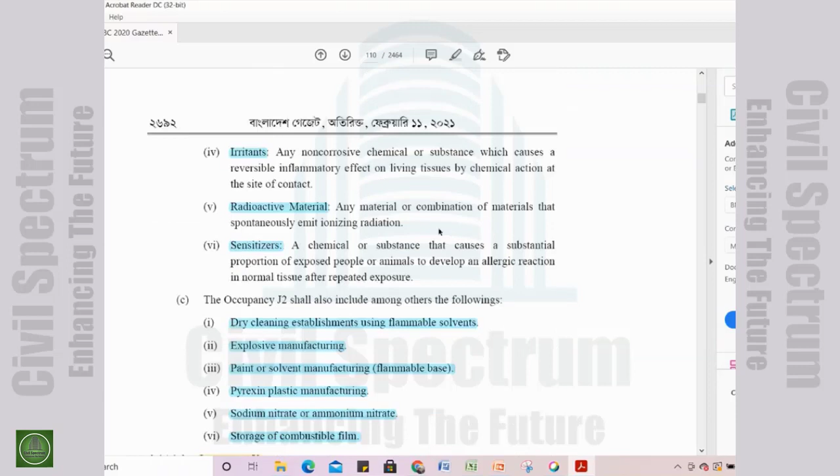Again, after covering the J2 category, there are some special components or projects that also will be categorized as J2, which are dry cleaning establishments using flammable solvents. So it will be categorized in J2. Explosive manufacturing, J2. Paint and solvent manufacturing, flammable base, will be J2.

Pyroxylin plastic manufacturing will be J2. Sodium nitrate and ammonium nitrate will be J2. Storage of combustible film is J2. So all these items present will become hazardous occupancy J2.

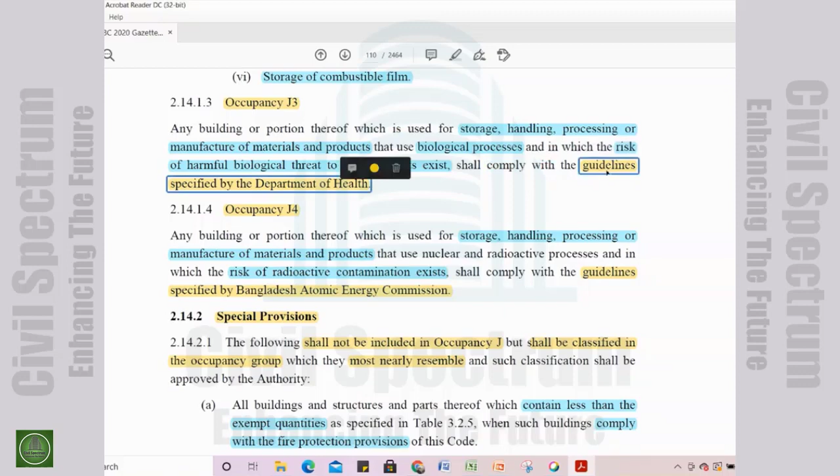Now comes the occupancy J3. J3 again, it is about the storage, handling, processing, manufacturing of materials and products that is using biological processes, and in which the risk of harmful biological threat to the occupants exist. Here is one important reference: the guidelines specified by the Department of Health must be complied with. So for occupancy J3, there is a new authority as well. We must comply with the guidelines of Department of Health.

Occupancy J4 - occupancy J3 was biological hazard, by the way. So occupancy J4 is radiation hazard. So as usual, the storage, handling, processing, manufacturing of materials and products that bears the risk of radioactive contamination, they must comply with another authority's guideline, that is Bangladesh Atomic Energy Commission. The guidelines of Bangladesh Atomic Energy Commission will be complied for occupancy J4.

So special provisions: the following shall not be included in occupancy J, but shall be classified in the occupancy group which they most nearly resemble, and such classification shall be approved by the authority. So there are some exemptions here.

All buildings and structures and part thereof which contain less than the exempt quantities as specified in Table 3.2.5, when such buildings comply with the fire protection provisions of this code. So if you have a hazardous material less than the exempted quantity and you comply with the fire protection provisions of this code, you can have it as an accessory occupancy of your main occupancy. So that is one special provision.

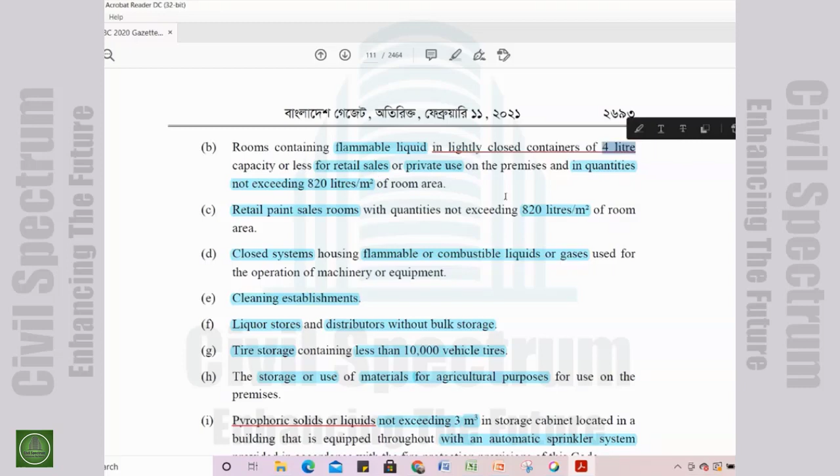For paint retail sales, the quantity will be 820 liters per square meter. It cannot exceed a room area where the paint is more than 820 liters per square meter.

Closed system housing flammable and combustible liquids or gases used for the operation of machinery or equipment. So the closed system is basically a system that allows the combustible situation with the assistance of oxygen within a closed environment, a closed container. So that is called a closed system. So for this there will be a flexibility.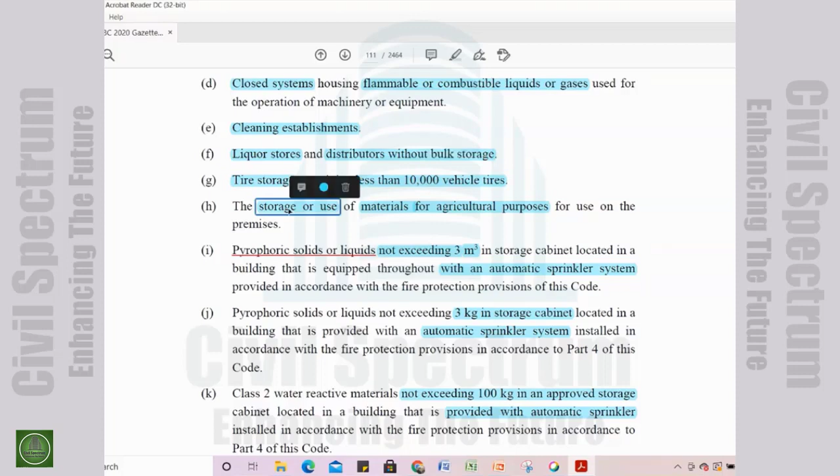Cleaning establishments will be out of this criteria. Liquor stores, distributors without bulk storage - so liquor stores and distributors without bulk storage will fall into this category. Tire storage containing less than 10,000 vehicle tires. The storage or use of materials for agriculture purpose.

Likewise, some other elements like pyrophoric solids and liquids not exceeding 3 meter cube in a storage cabinet, in a building equipped throughout with an automatic sprinkler system, will be exempted from J1 category, provided it complies with the fire provisions of this code. 3 kg or less of pyrophoric solids and liquids in a storage cabinet installed with a sprinkler system will also be exempted if compliant with fire protection provisions.

Class 2 water reactive materials not exceeding 100 kg in an approved storage, provided with automatic sprinkler and fire protection provisions, will also be exempted. So, therefore, there are few provisions for construction, height, and allowable area.

Let's go to the floors and spaces containing hazardous material. In areas where motor vehicles, boats, helicopters, and airplanes are stored, repaired, or operated, the floor shall be of non-combustible liquid tight construction. So there is a new type of construction, liquid tight construction. The liquid cannot penetrate through the floor, and the material must be non-combustible.

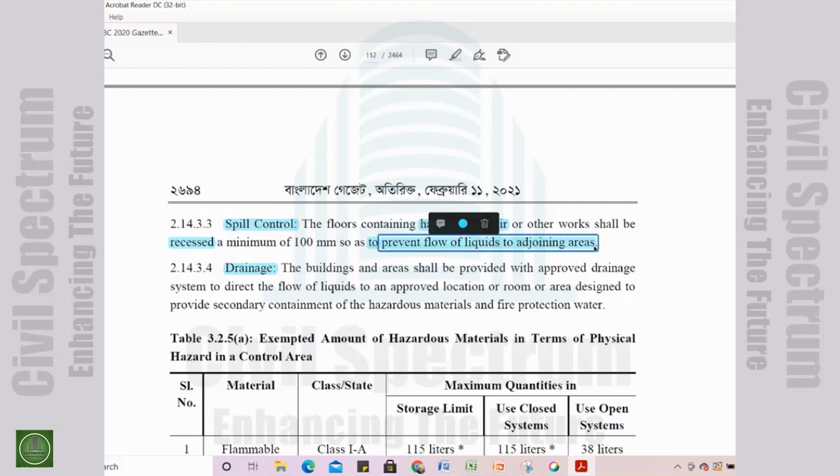There will be some exceptions, we are not going into the detail. Spill control for such floors, where hazardous repair is happening, there will be a recess to prevent flow of liquids to adjoining areas. Drainage provisions will be made for this situation. We are quite familiar with hazardous material exempted quantity, as we've gone through it in the last presentation, so I'm not going into detail on these materials again.

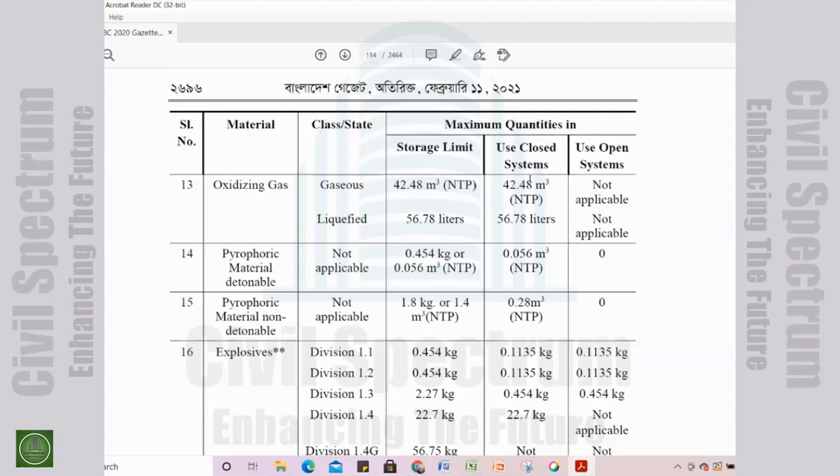There is just one footnote here: the maximum quantities may be increased by 100% where areas are not accessible to the public in buildings provided with automatic sprinkler system. So here is a quantity defined, but it can be increased 100% if the area is not publicly accessible and fitted with an automatic sprinkler system.

There are a few provisions for which we need to consult the Explosive Control Act, regarding separate drainage systems and containment and overflow of liquids. When such hazardous materials are dealt with, we need a secondary containment system which will collect the residue and clean it before disposing it to the adjoining property, storm drain, or any other sewerage system. So it is also about secondary containment storage.

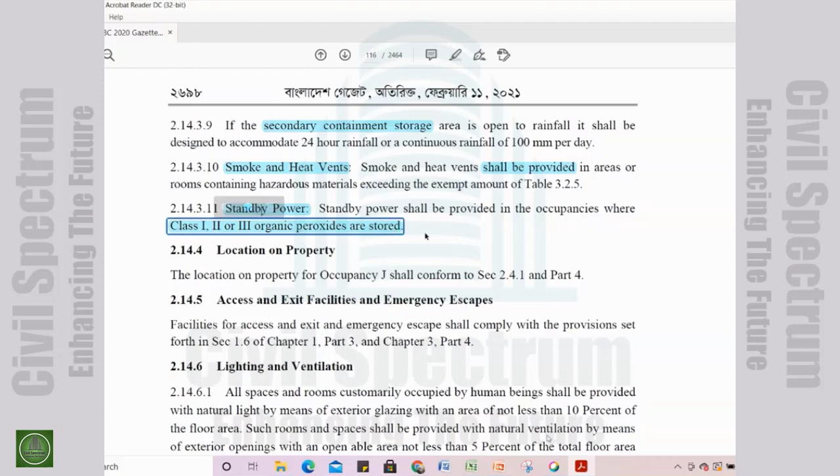Smoke and heat vents shall be provided. Standby power shall be provided in occupancies where class 1, 2 and 3 organic peroxides are stored. This is a special situation needed for a particular type of storage. Location of the property, access, exit, emergency escape, lighting, and ventilation go in a similar way. Ventilation in hazardous locations.

Yep, out of time, okay. Well, yep, yeah, I think I'll try to wrap it up within 10 minutes and then we'll go for the question answer session. Thank you.

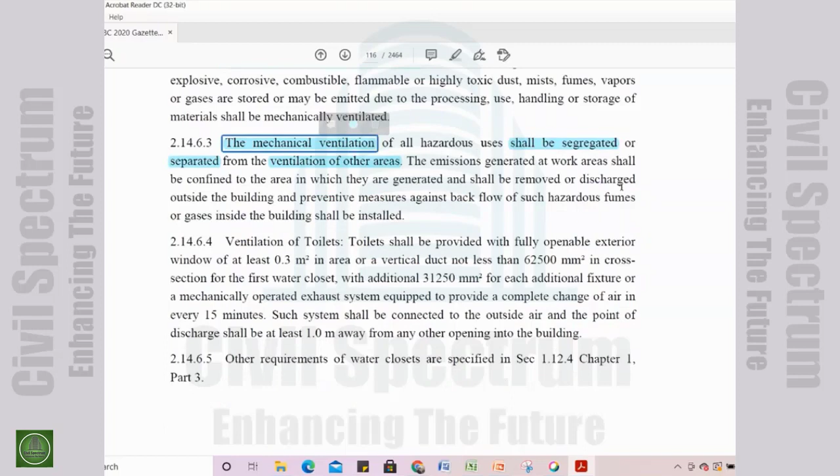So ventilation of hazardous locations, there are provisions for that: mechanical ventilation, how it will be segregated or separated, especially in areas where hazardous uses are present. There are provisions for that, and other provisions for ventilation.

Sanitation, shaft and exit enclosure, fire detection, alarm, evacuation, extinguishing system - as you know, they are referring to the same references again. And for explosion control, there are few provisions.

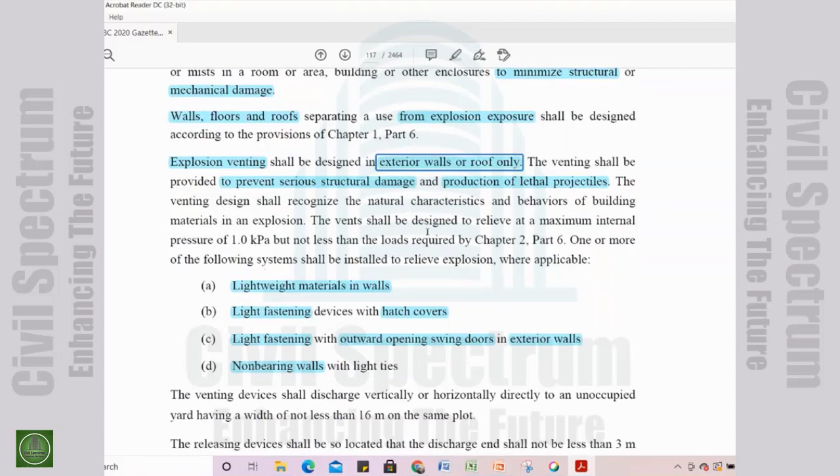We are not going into detail right now, but there are few ideas that can be introduced here. One is about protective devices, suppression systems, or barricades. They can be used to control or vent the gases. So there are explosion venting measures usually directed to exterior walls or roofs where it is safe to discharge. That is one of the ideas.

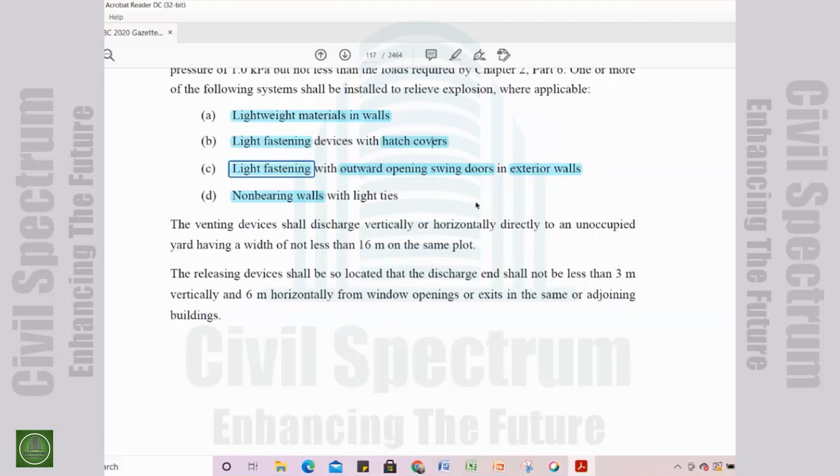In areas where such risk is involved, lightweight materials are used in wall construction. It is not an attempt to control the explosion, rather it is allowed to vent out, within safety provisions, in some direction. Light fastening hatch covers - hatch covers must be lightly fastened. Light fastening outward opening swing doors in exterior walls, so that if anything happens, the door bursts outward and vents out the major load of the explosion. And non-bearing walls with light ties. So these are the explosion measures.

For special hazard situations, chimneys, vents, and ducts must be of non-combustible material. Like for boiler, heating plant, electrical room, water supply boiler - they have to be separated from the rest of the occupancies, and must have a 2-hour fire resistive construction or more.

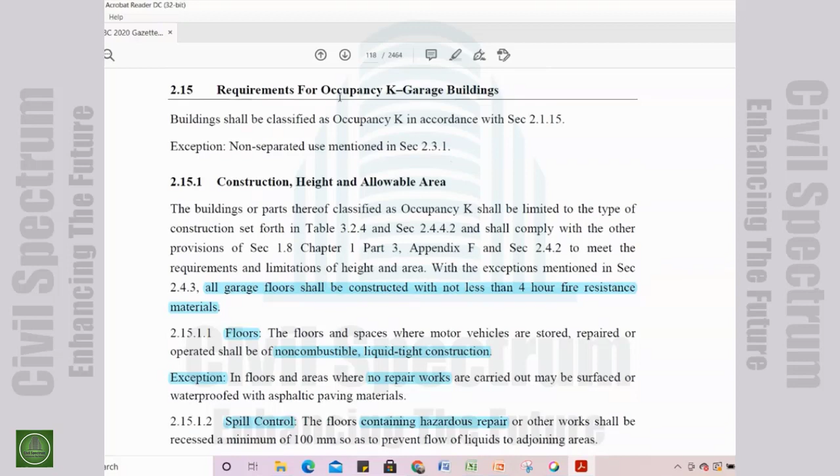There are a few points we are not touching, as we have some shortage of time. For occupancy K, the garage building, there are a few special provisions, like all garage floors shall be constructed with no less than 4-hour fire resistive material - the floors, of course. So floors have to be of non-combustible liquid tight construction.

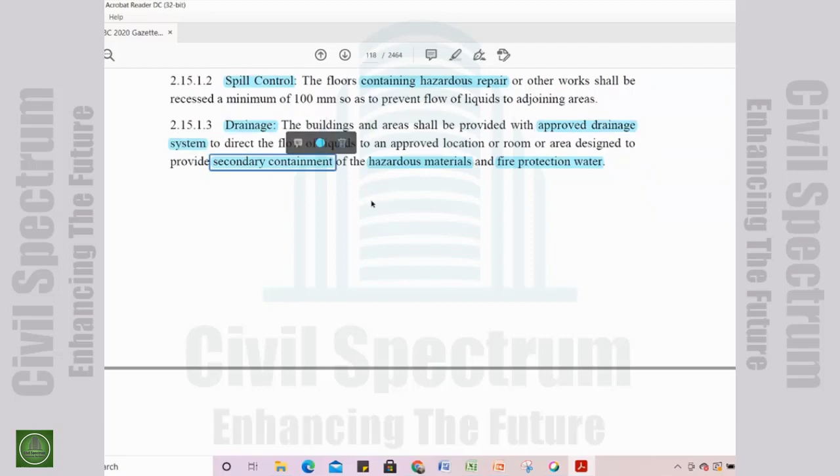Spill control: garages may create hazardous liquids or elements, so we must control spill. Drainage: we must have an approved drainage system and a secondary containment system for hazardous material and fire protection water. The drainage system must be designed so that in case of fire, when the sprinkler system is on, it can carry the discharge of sprinklers. That must be considered when designing the drainage system.

Quality of discharge of liquids must be of approved level before discharging it to sewer, natural system, or river.

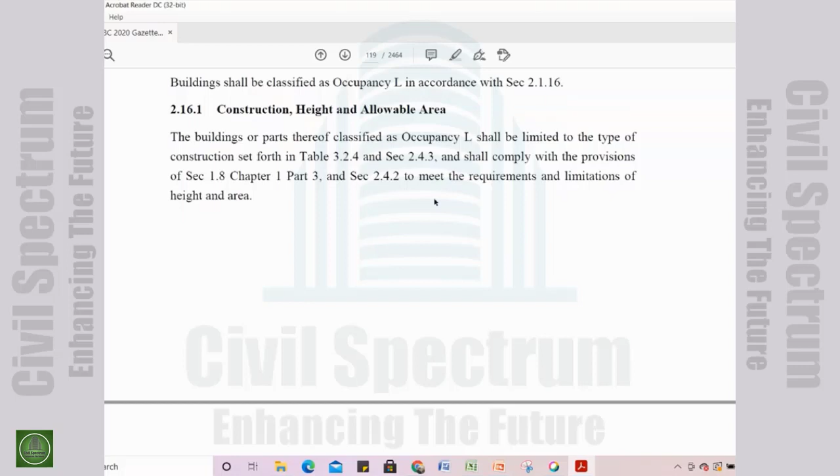There are other common references for this particular occupancy. Occupancy L, as we know, can be considered as a non-separable occupancy or an occupancy with special measures. It has all the similar things as other occupancies, but a few special features which we have already covered in other areas.

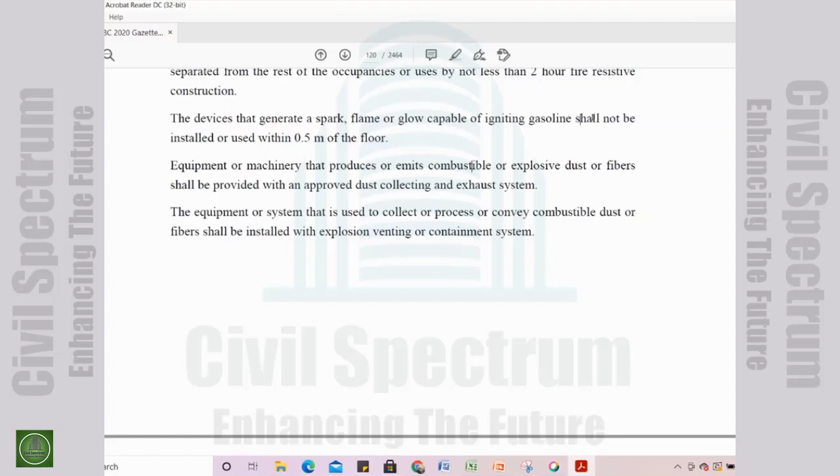When chimney vents and ventilation ducts are present, they have to be of non-combustible materials. Boilers, central heating, and electrical rooms have to be of 2-hour fire resistive construction where there is a risk of generating spark, flame, or glow. It shall not be installed or used within 0.5 meter of the floor, so it will be lifted up.

Equipment or machinery that produces or emits combustible or explosive dusts will have measures for that. So that is what occupancy L, or utility occupancy, is.

Requirement for occupancy M, or miscellaneous, as we already know, has two subcategories: one is M1 and the other is M2. The buildings or parts thereof classified as occupancy M shall be limited to the type of construction set forth in 3.2.4 and shall comply with the requirement of the section. It is general information or references leading to other chapters and parts.